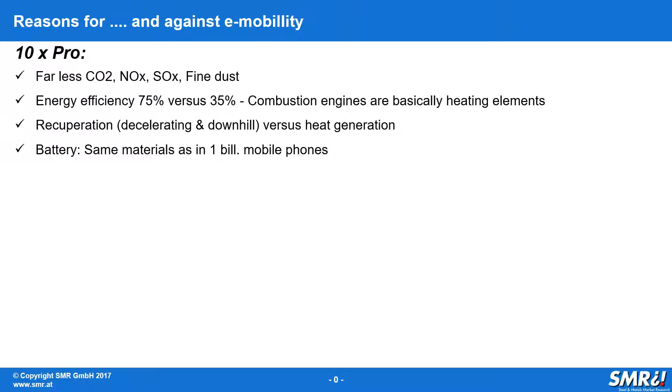Recuperation during deceleration, and if we go downhill, is bringing electricity back into the battery. If a conventional car goes downhill or decelerates, it again generates heat. The battery, these are exactly the same materials in the battery as in 1 billion mobile phones every year. So I don't know why this is bad and the other batteries are the good ones.

Cobalt, much discussed for various reasons, I must say, and this is what most people do not know: the biggest cobalt use is now tungsten carbide machine tools, which have 8 to 9% cobalt, and the biggest application for them is machining combustion engine and powertrain components. So there is probably more cobalt in a conventional car than in a battery, especially with the new chemistries of the batteries now.

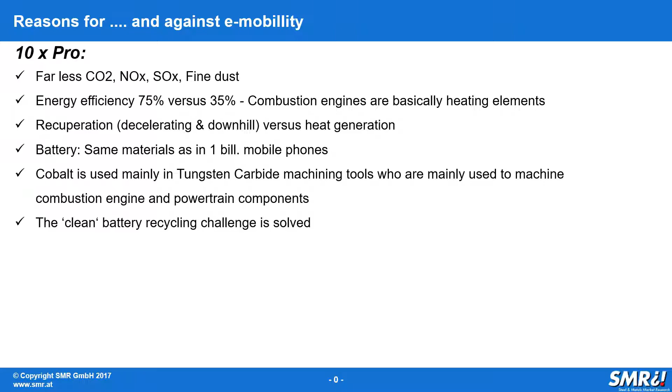Clean battery recycling challenge has been solved. There are various technologies to recycle 97 or 98% of the metals in batteries.

Macroeconomic, this is another important issue that most people don't look at. The EU imports every year 200 billion euros of oil. Can you imagine how many renewable power plants you could build for that money? For example, solar in Germany, in Bavaria specifically, is now possible for less than 5 cents per kilowatt hour, absolutely clean, zero emissions, and also economic.

The range problem is no problem for 95% of the people. Only if you are a taxi driver or an Uber driver, then this might be a problem. Superchargers on the highway charge from 20 to 80% in 20 minutes. So if you have a cappuccino and do a few emails, you're ready to go again.

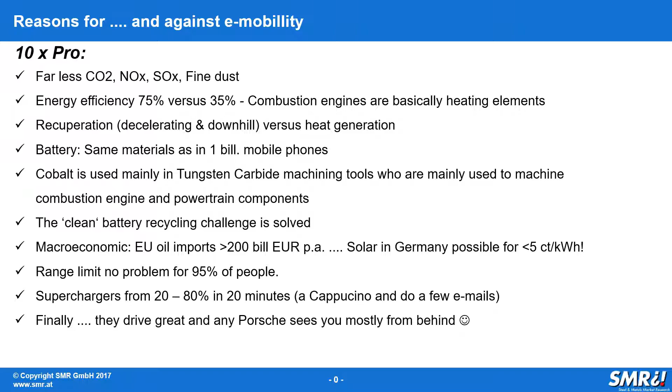Finally, these cars drive great, and most of the Porsches see you only from behind. I know by now hundreds of people who switched from conventional cars to e-cars. I do not know a single one who switched back to a conventional car.

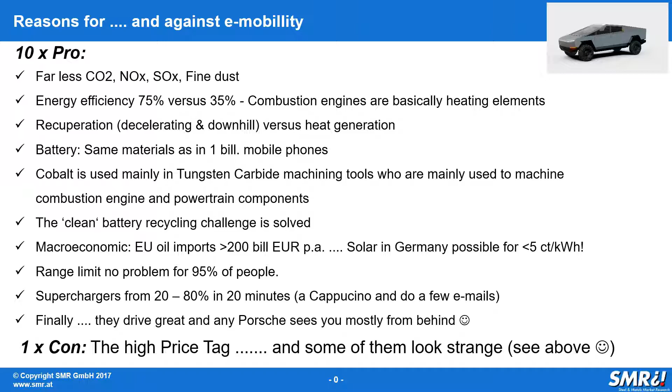But there is a reason against it, and this is of course still the price tag. And you have to say also some of them, like the new Cybertruck, look a little bit strange. But the good thing about the Cybertruck is it's made fully of stainless steel, a special kind of 301-300 series stainless. So these are all the applications that you find stainless steel used for in car components.

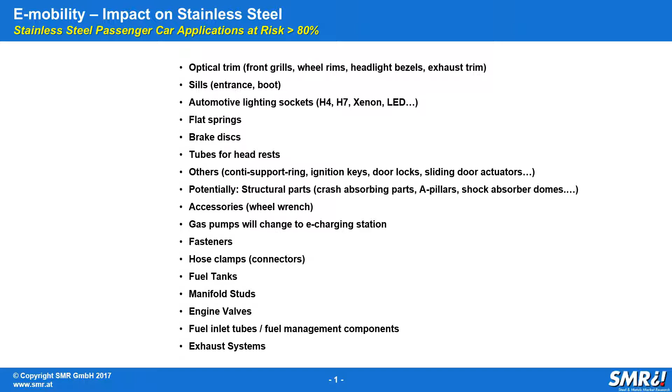In total, we have about 29 kilos of flat products, mostly sheet and strip, and 4 kilos of long products, mostly bar and wire rod. That makes an average car in 2019 contain 33 kilos of stainless steel.

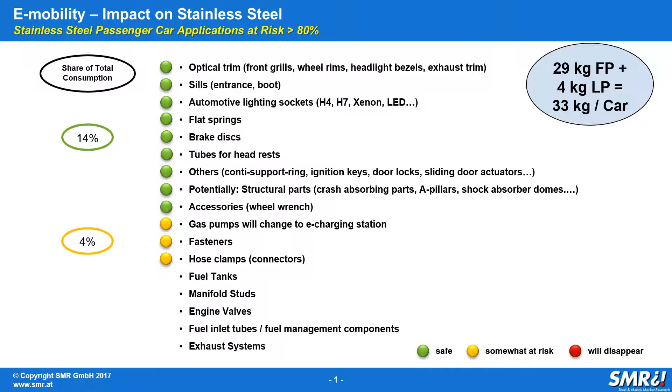Now when we look at what is safe also in e-cars, you see that about 14% of this volume, over 3 million tons, is safe even in e-cars, no changes coming. Somewhat at risk is about 4%, and unfortunately 82% will disappear with the electrification of traffic. The main reason for that, of course, is the exhaust, which is the heaviest component made from stainless steel.

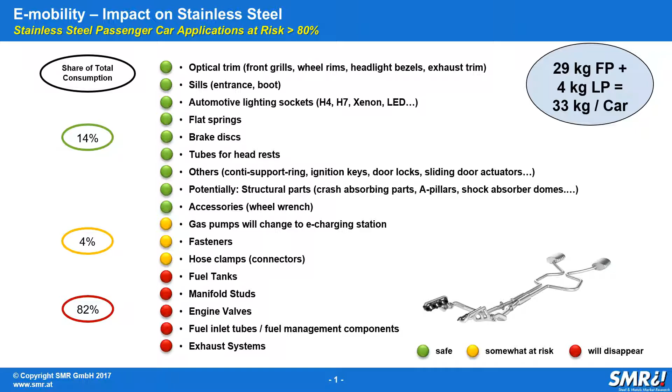On the other side, e-cars, using various forecasting agencies like Marklines, will grow to about one third of all cars produced by 2030, and plug-in hybrids, while important, will not significantly increase again, because in our opinion that's a bit of a transition technology. With better batteries, which we definitely will have in 10 years, there is actually no need for a plug-in hybrid anymore. So what does that mean for stainless steel?

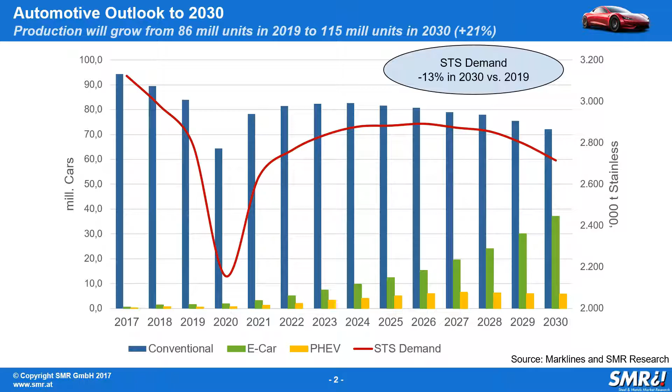Well, we have seen that there are quite some changes ahead, not all of them positive for us, I have to say, but I think the key takeaway is that the stainless steel industry has the next 10 years to prepare for this significant reduction in demand from the automotive industry. That means we should develop new products that can be used in automotive — I'm talking about body-in-white, chassis, crash parts, for example, that could be made from stainless in order to compensate that loss we are having in relation to combustion engine components.